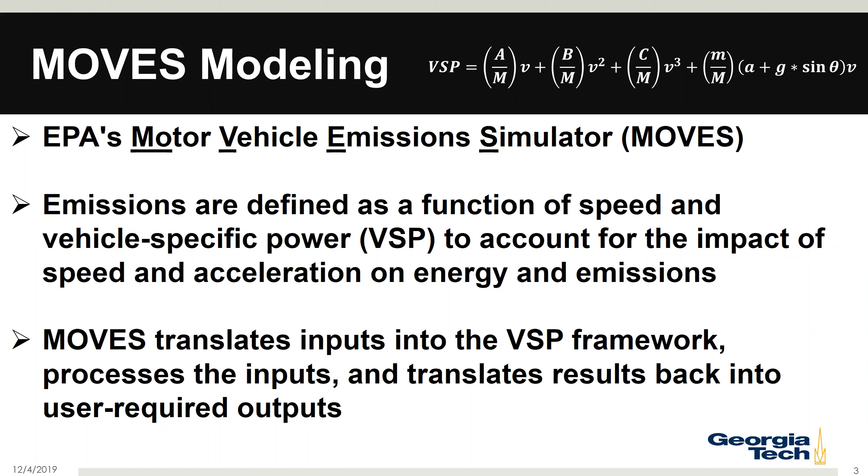And that translates into differences in vehicle-specific power and therefore energy use and emissions. So the bottom line here is that because MOVES is translating your inputs into this VSP framework, and then operating within the model and then translating these things back out into emission rates, we wanted to develop a system that would allow us to do things a little bit easier than working with MOVES directly in each application.

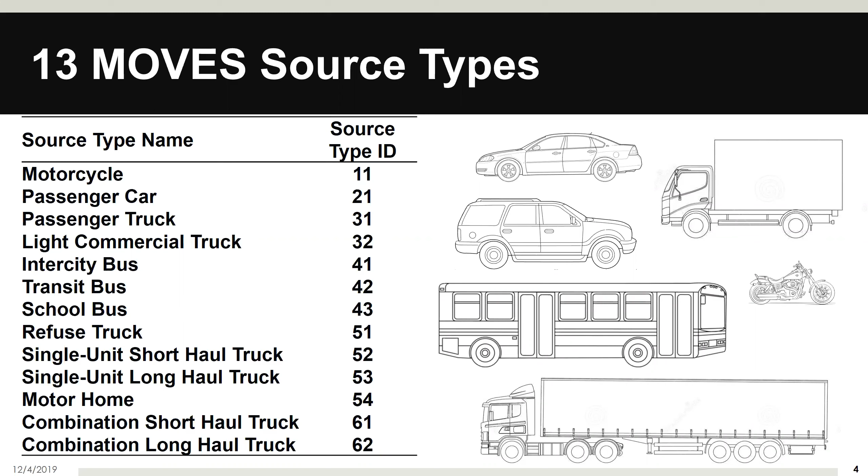MOVES models emissions and energy use across 13 different source types. And so when you run MOVES, you're going to get different emission rates for each of those vehicle classes, and you'll get different emission rates for how those vehicles are being operated. If you look at just a typical emissions rate in grams per second, you can see that we've got 23 different operating bins across there. They're numbered from 0 to 40, but there's some that are missing.

And really, it's divided into a couple of different regimes. You've got 3 different speed regimes, a low, medium, and a high speed regime. And then you have the VSP calculation using the equation up at the top. And as you move up in VSP, you move along those bins from left to right. You've got a braking bin, you've got an idle bin, and you've got low speed coast and medium speed coast. And then as the VSP increases, you can see that each of those curves upward to higher gram per second emission rates.

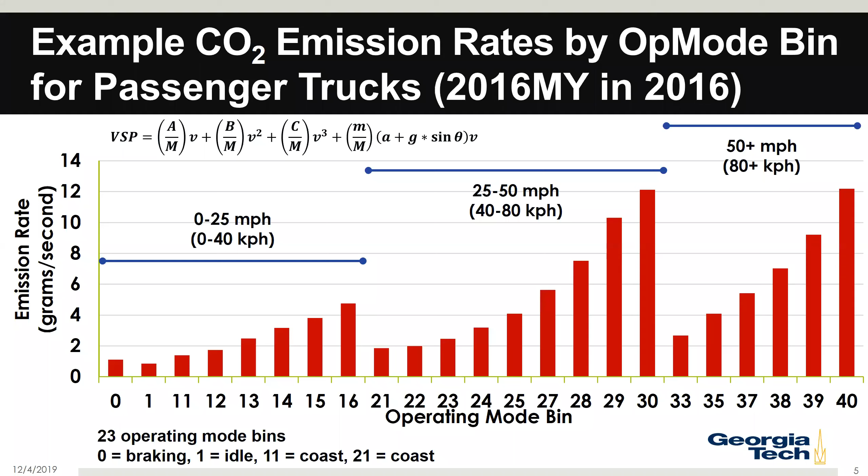So the bottom line with MOVES is that first you specify what the vehicle fleet looks like and break those down into the individual vehicle classes. And then you specify the model years for those vehicle classes. And then you specify the way that those vehicles are being operated, whether you have an average speed and a driving cycle that goes along with that, or you have individual second by second data, you can actually calculate the VSP for those roadway operations.

This animation here is the federal test procedure, the driving cycle. And what we have going on in the upper bound there is the speed, second by second speed over time as the vehicle is driving along on the laboratory treadmill. And you can see that for every second of operation, the VSP is being calculated, and you have the bins of VSP operation down in the bottom. So those correspond to the 23 different bins numbered from 0 to 40.

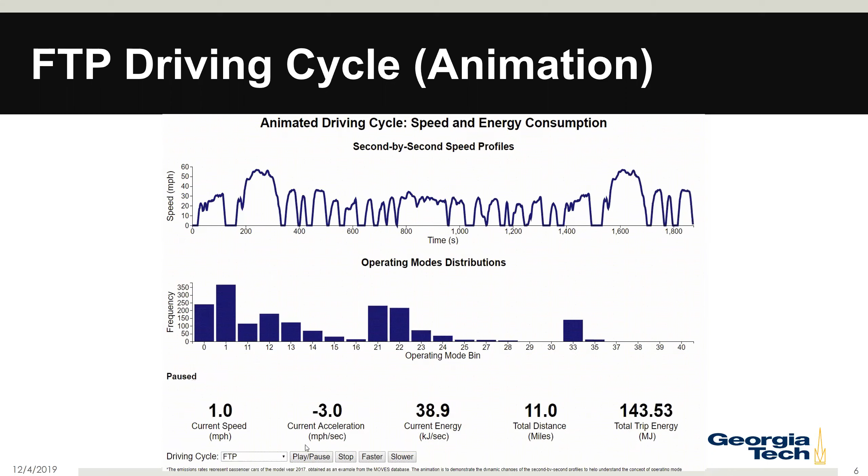And if you look on the very bottom line, you can see the instantaneous speed and acceleration, the current energy consumption, total distance traveled, and the trip energy accumulated over that time. So we've basically been able to hook in with MOVES and those MOVES emission rates to be able to operate the underlying characteristics of MOVES at different spatial and temporal scales.

So if you've used MOVES, whether you've used the old MOBILE model or any of the new MOVES models, modeling complicated networks is really kind of a challenge. And it becomes kind of tedious. It requires that you generate different emission rates for different vehicle operating characteristics.

And traditionally, modelers have tried to simplify things by, I don't want to say dumbing it down, but by aggregation to say, well, we're going to assume that all vehicles are driving under the driving cycles embedded in the average speed and facility type. We're not going to care about whether or not there's a difference between the different vehicle classes in terms of their operations on the road. And maybe we'll use one distribution of model years for all of the vehicles, or at least for all of one source type. So we either simplify the inputs, or we create these lookup tables to support the modeling that we do want to do.

And that generally consists of running MOVES for those scenarios. Let's say, I want to have an emissions rate for 25-mile-an-hour average speeds on arterials that I can apply in Cobb County, because the fleet is different in Cobb County than elsewhere. You pre-run all of those different conditions that you want, generate your lookup table, and then apply the lookup emission rates in the modeling that you're doing.

So the goal here with MOVES-Matrix really was to pre-run MOVES for all of the different combinations of input data. So configure it for distributed computing so that we can take advantage of multiple cores on a supercomputing cluster. Iterate the inputs across all of those different input combinations and run MOVES thousands of times for a region in advance of having to do the modeling.

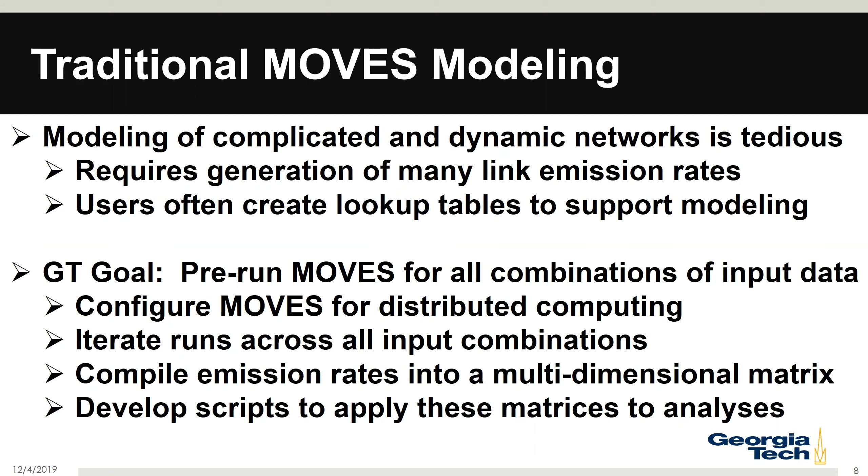And then compile all those outputs, those energy use and emission rates, into the multidimensional matrix, so that's MOVES-Matrix. And then finally develop a series of scripts to then apply these matrices to any analyses that we want to run. For a metropolitan area, it takes about 30,000 MOVES runs to do the on-road exhaust emission rates and energy use. So this is not the hot soak, it's not the extended idle, it's none of the other supplementals. We'll talk a little bit more about that later on, but it takes an awful lot of MOVES runs to do this. It's across 21 calendar years.

In Atlanta, we have a summer, a winter fuel, and a transition fuel for a number of months as we go from the summer to winter and back. We're doing 23 temperature bins, so 5-degree Fahrenheit increments, and 21 humidity bins. It takes about 20 minutes per core per run, so about 5 days to process all of the different emission rates or all the different input files for Metro Atlanta. And that's given we get about 80 cores at a time that were assigned by the computing cluster that I'll show you in a minute.

The bottom line is we're generating not hundreds and thousands and millions, but 5 billion running emissions rates per region. So it's a pretty good sized matrix. It's 121 gigabytes. We've done more than 1 million MOVES modeling runs, probably about 1.1, 1.2 million modeling runs to date to generate the state of Georgia, state of Texas, Vermont, a variety of different locations across the United States. I should point out that this is assuming a fuel specification program and assuming an inspection and maintenance program. So for each modeling region, if they have a different fuel specification or inspection and maintenance program, you have to do the 30,000 MOVES modeling runs.

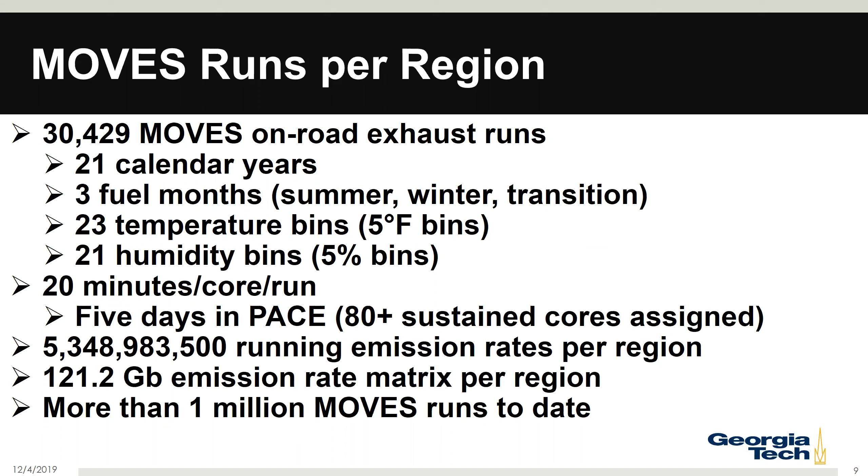It turns out that across the United States, there's 117 different combinations of fuel specification and inspection and maintenance program. So running MOVES-Matrix for the entire country is a little bit daunting on an 80-core supercomputing cluster assignment. So much larger computing clusters are needed to generate everything for the entire nation. But we've been responding on demand as folks need applications. We will develop the models for their region and send them the results on an external hard drive, 121 gigabyte matrix, and all the Python scripts that they need to process.

So the way that we do this is through what's called the PACE supercomputing cluster. It's actually a co-op more than anything. Faculty members that want to participate in the co-op, they have a research project that will provide funding to purchase new cores for the system. I'm not sure if this is a sustainable system because as old cores go out, new cores have to come in. I'm not sure if this is a pyramid scheme or not, but the bottom line is you buy your way into this, and then you're assigned cores based on the number of cores that you've contributed, and then excess time on cores is made available to individuals as a function of being online and availability.

It's a pretty good size system. We have a new system that's just been implemented over in a new building that's been constructed on campus. We're looking into how to get onto that system that's much larger and much faster, but this is still an outstanding resource for us. I would also say that one of the big benefits of this supercomputing cluster, and I can't recommend it highly enough, is the fact that they have staff that are stationed at PACE that work with the researchers. So these are not just computing staff, these are research staff that operate out of that system, and we collaborate with them on a variety of different projects. So they're great to work with and provide a lot of really good support.

And they also tell us when we're breaking the system, which is an advantage for the overall system, not necessarily for us. We have found that MOVES is not structured as efficiently as it could be for operating on a supercomputing cluster.

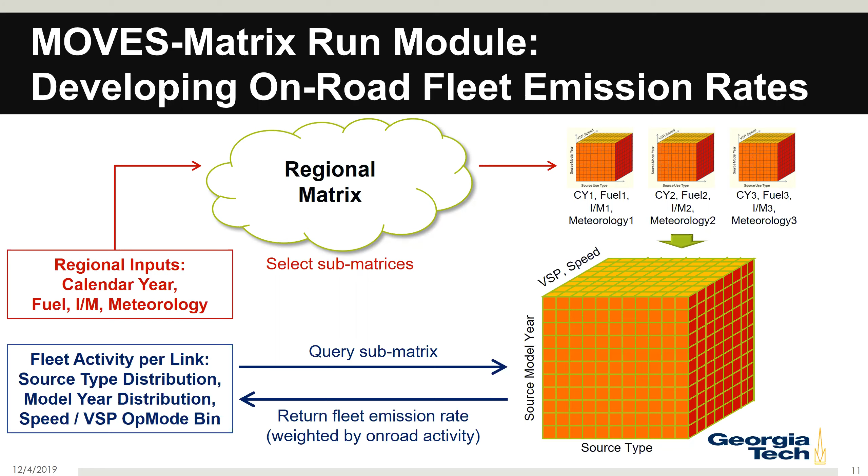And the advantage of this is that we get exactly the same results as using MOVES. All we're doing is outputting all of the possible combinations, and then we're reassembling those combinations in the exact same way that MOVES does before it gives you your gram per second or gram per mile emissions rate. And I don't know about you, but I don't think I've ever worked with a project where the R squared was 1. It is a perfect match, which is great. So the differences that you see at the bottom are only associated with rounding, and that's not 0.01%, that's 0.0001%. So it's an excellent match.

We also developed for the Atlanta metro area, not for any other regions, what is known as MOVES Matrix 2.0. We knew that we didn't have the start exhaust emission rates in there, truck hoteling and evaporative emissions, and we wanted to be able to do regional emissions inventory analysis for the Atlanta metro area. So yeah, we have the running exhaust that we can do for anywhere, but doing this for all of the start and soak and all of those emissions takes a lot longer. As I recall, it takes about 20 days on the supercomputing cluster to generate the matrices for a region, and the matrices are absolutely huge. But we have done it. We're capable of doing it for any region. It's just a matter of having enough supercomputing time to generate the rates for other folks. And again, we get the R squared of 1.

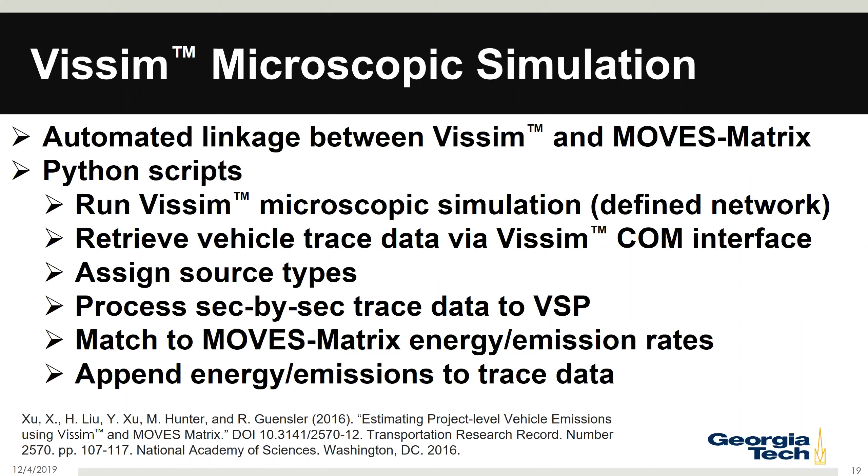So we process each of those second-by-second traces to VSP. We match the individual vehicles with the energy and emission rates that go with it. And then again, through the COM interface, we append the data back to the trace data. So in the output file, you then have the ability to look at the animation of energy consumption or emissions. This is for CO2 emissions, so energy consumption as well.

But really what we're doing is calculating the second-by-second VSP for all of those vehicles, applying the emissions rate, and then animating that output. So you can use it for comparative analysis for scenarios, like you're going to change the highway operations design, add a lane, subtract a lane, change a weaving section, all of those things that VISSIM will allow you to look at, and then you can generate the energy and emissions changes that go along with that.

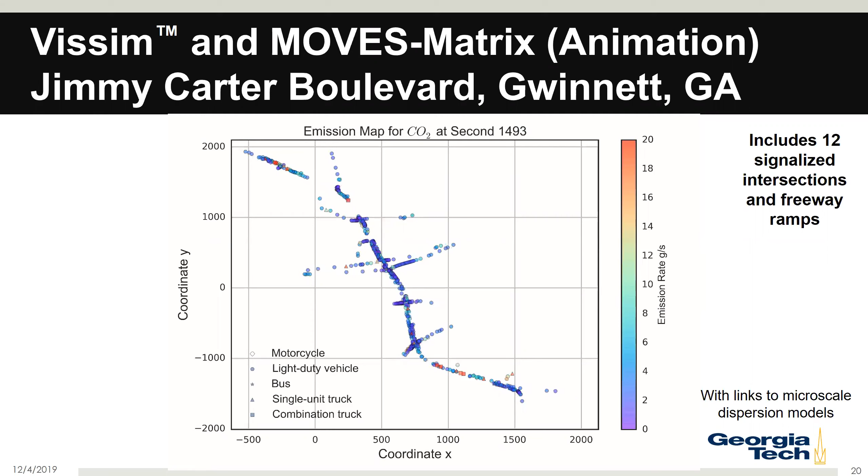AERMOD is the pollutant dispersion model that we're currently using. This is what Daijin has been working with on the supercomputing cluster. We use it both for air quality impact assessment for things like environmental impact assessment, comparing across alternatives, for conformity analysis, and for health impact assessment.

So the goal here really, because AERMOD is another one of those models that takes a while to run, is to try to speed up the predictions of downwind pollutant dispersion from vehicle activity, and then to also do some link screening, which we'll come back around to, basically ignore those links that aren't contributing emissions at a receptor that you're interested in. So AERMOD for microscale dispersion is available free for anybody to use, and we'll talk a bit about how we do the worst case pollutant concentrations and identify hotspots.

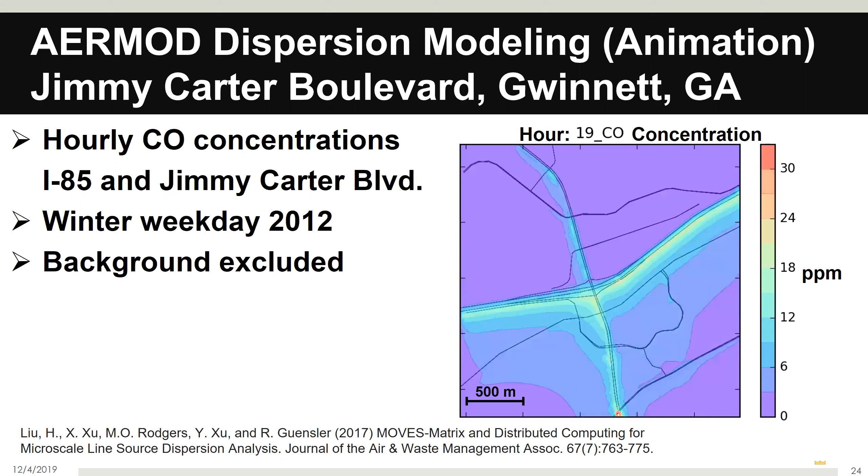So what's going on here is a linkage between the traffic volumes observed on Jimmy Carter Boulevard and the hourly CO concentrations that result. This is for a weekday in 2012, where the background concentrations are excluded. And the concentrations are not super high. They get up quite a bit at the peak of the peak.

And in terms of the regional scale applications that we've been doing, and we'll talk about how we speed up those processes in a minute, if you look at the time it takes to look at the impact of every single link on every single receptor, where you've got a grid of receptors over the metro area, it takes about 10 days to process on the supercomputing cluster. So think about it. We've got an awful lot of links that break down to 161,000 individual polygons for AERMOD analysis. We've got 1 million receptors that we overlaid on this grid. So it's quite a computational process.

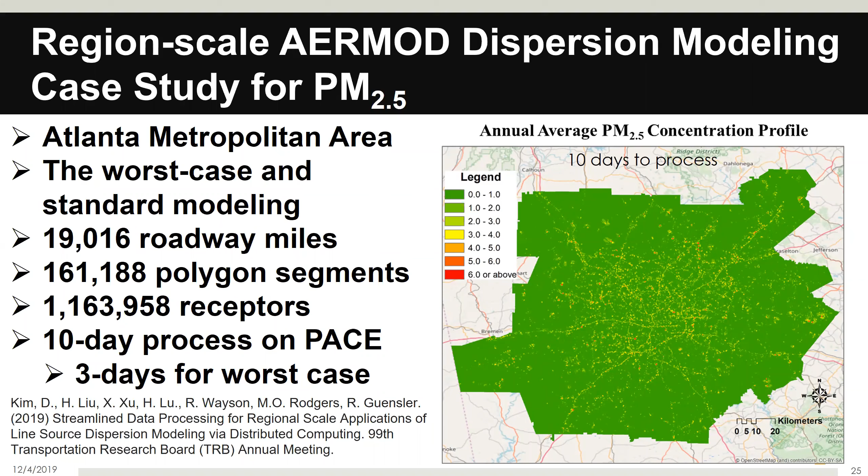You can do a worst case analysis using the highest emissions rate selected, and it only takes about 3 days to process that. But you have the capability of both doing a regional analysis over a long period or doing a short-term analysis to get those highest pollutant concentrations.

Before we move on to the next step, I do want to mention that one of the things that we've been doing is working with grade. And part of helping Liu's dissertation work a couple of years back was to develop a process and procedure for generating road grade at very high resolution over the transportation network in Georgia.

For Atlanta alone, we have about 1,400 miles of freeways, 7,500 miles of major arterials, and 12,000 miles of local roads. And using the U.S. Geological Survey's digital elevation model, and a variety of techniques for filtering and smoothing, and inserting roadways where you have bridges over culverts and things like that.

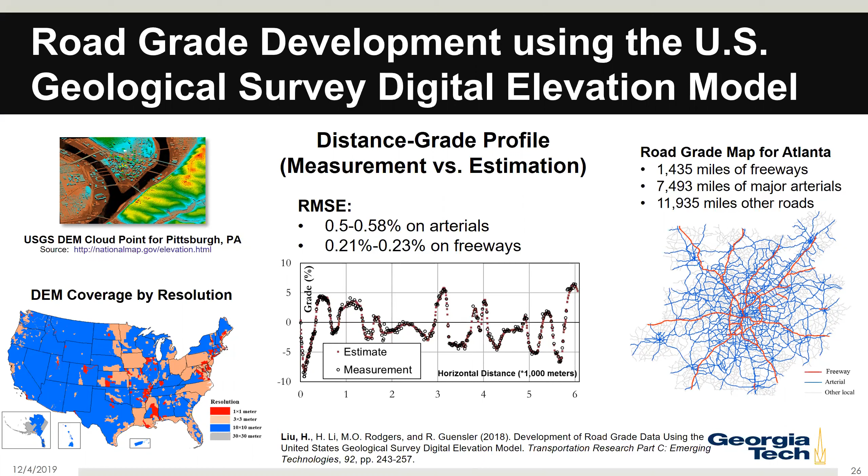That process allows us to get about 0.5% grade accuracy on the arterials and down to around 0.25% on the freeways. So this is really good quality grade data at very high resolution on those freeways and the arterials. So having the availability of this high resolution digital elevation model, you can take any second by second data from observations in the Atlanta metro area, and you can assign for every second of operation, not just the speed and acceleration that you may have monitored or simulated, but now you can assign the grade to that based on the actual roadway grade for that location.

I mentioned at the very beginning that it does matter what the speed and acceleration characteristics are, and what the grade is. So in other words, when you're looking at heavy duty trucks, for example, the upgrade is different than the downgrade. Not as much for the light duty vehicles; they operate pretty similarly. Knowing what the grade is in terms of the VSP calculations does matter across the board here. Knowing the difference between the speed and accelerations across the grade distribution, say uphill versus downhill, is not nearly as important for the light duty vehicles, but does become important for the heavy duty vehicles.

So this is one of the applications that we've developed with the activity data that was collected on a second by second basis for the metro area as part of the Atlanta Regional Commission's travel diary surveys that they did in 2011. So we actually had about 500 vehicles that were monitored second by second. And then we collected data from a variety of MARTA bus lines and different activity characteristics on different routes. So it does make a difference.

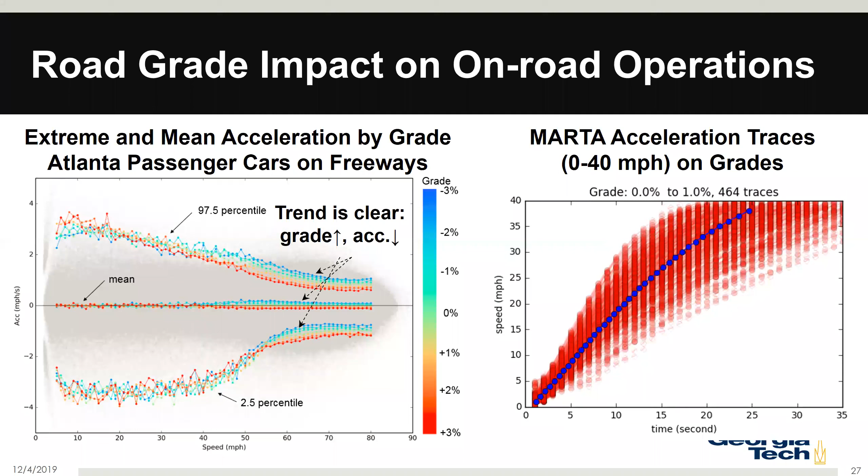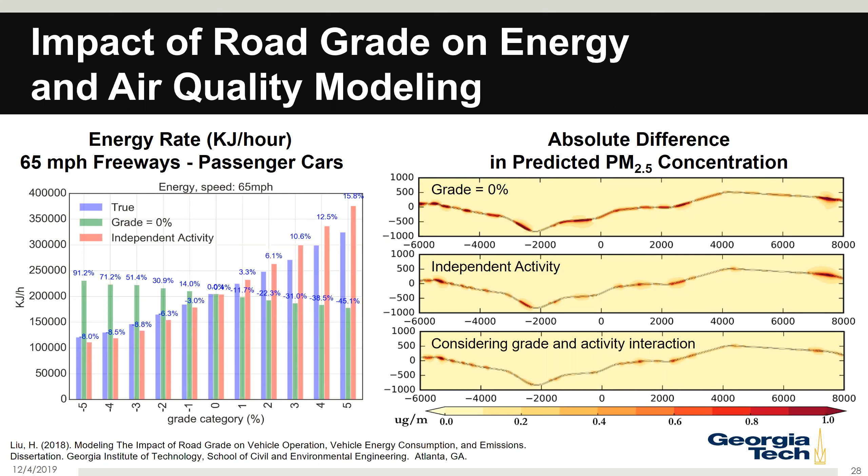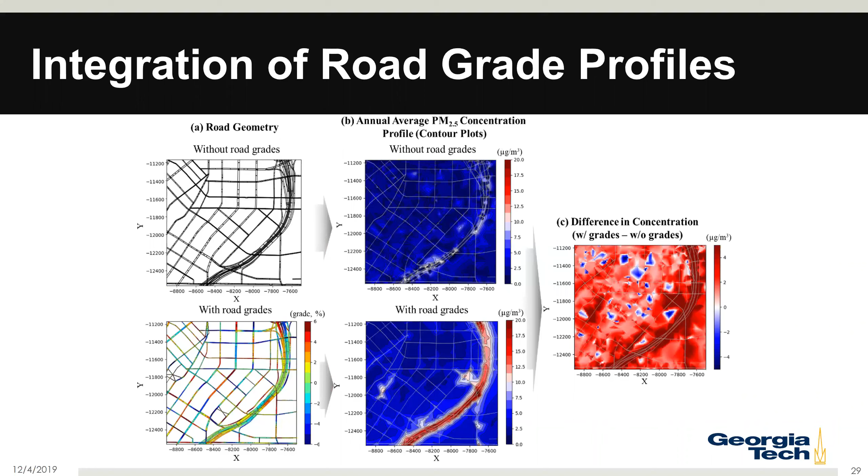The last thing I want to mention is with respect to gridded modeling, because again, when you think about it, what if you can do all of your AERMOD analyses for a transportation plan at once, right? If you can look at every single location in the metro area by running everything in background on a supercomputing cluster, so that when the Atlanta Regional Commission finishes running their scenario, they get the emissions inventory for the region broken down by all those different characteristics. And then they can also get the predicted pollutant concentrations across the entire region. It makes our planning processes much more agile.

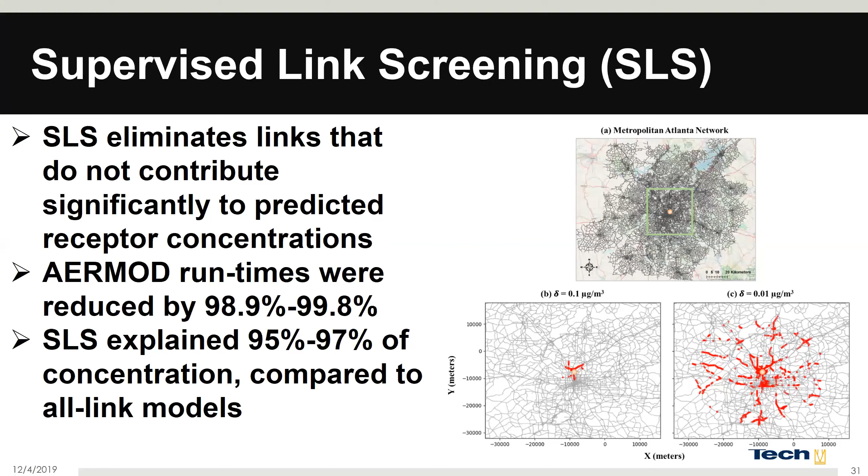So before we wrap up here, I'd like to talk a little bit more about some of the ongoing modeling work we have going. We got 2 new dissertations that are out. One is on the use of Autonomie to essentially generate VSP compatible emission rates for hybrid and electric vehicles, so that we can incorporate the modal-based activity for plug-in hybrids, hybrid electric vehicles by different type of hybrid, and battery electric vehicles into the MOVES framework. And then the second one uses the same kind of approach for the transit vehicles, but also includes some optimization models.

Forthcoming, we have some distributive justice assessment tools coming for planning, where we look at pollutant concentrations, impact on folks in the metro area, and looking at the outputs of the model with respect to whose activity is occurring and who's being exposed by income, household size, and all the other demographic characteristics. But because MOVES doesn't currently include battery electric vehicles and the like, we wanted to have some kind of a model that would be comparable to all of that.

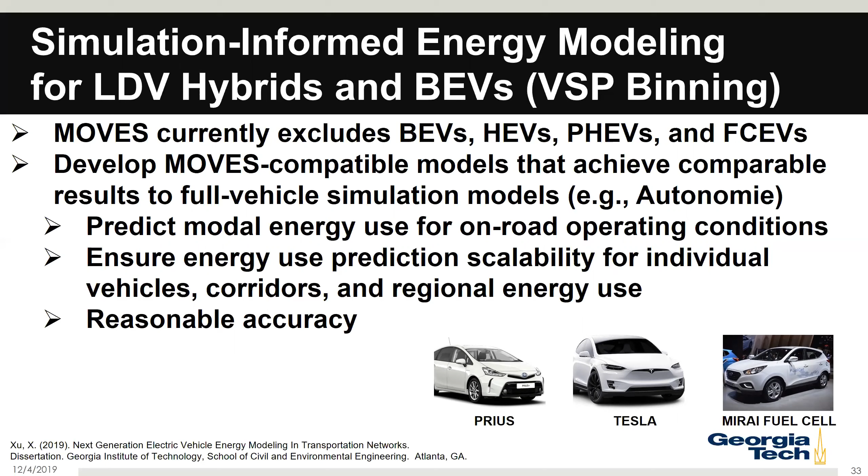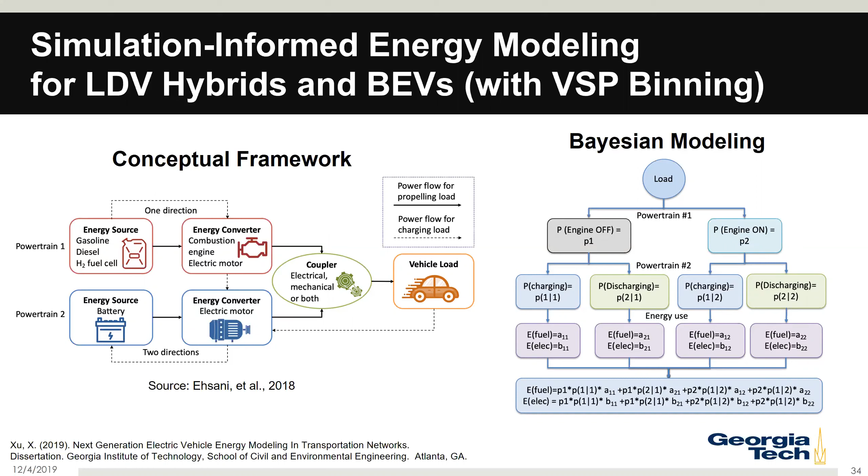And then for those operating modes, using Autonomie outputs for 50,000 second-by-second trips to develop essentially a VSP binning, a machine learning process to develop VSP binned emissions rates and energy use across both fuel consumption for hybrids as well as electricity consumption. And I have to refer you to the full dissertation to get the entire body of work. It's 150 pages or so.

But the bottom line is that it does a really decent job for the fuel consumption. We can do better on the electricity consumption, but really that comes down to the specification of the vehicles that we've used in the Autonomie modeling. So yeah, I know we are predicting predictions, right? We're taking a simulation model and we're taking those outputs and then we're predicting as efficiently as we can those simulation model outputs so that we can use them in the MOVES VSP binning approach.

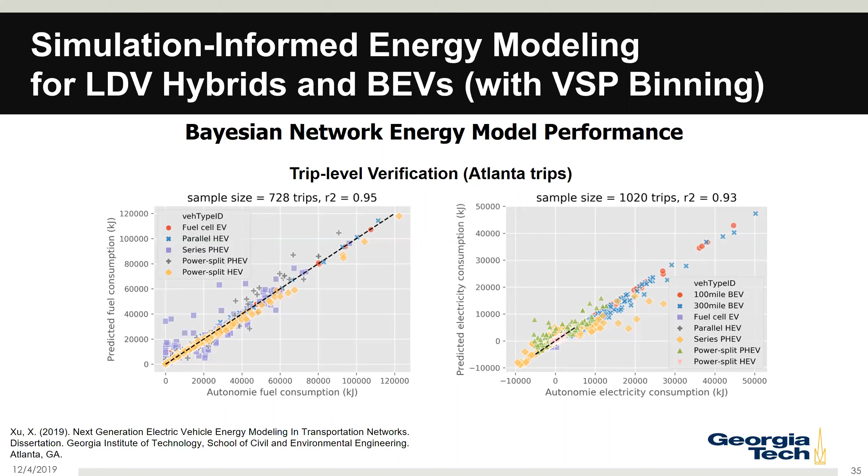But we think it's much better than what we have right now, which is pretty much nothing. So this is really good, and you're going to see some enhancements of this coming down the road.

In looking at the application, kind of scalability components of this, she applied this again to the metro area. She used the travel demand model outputs in terms of the trips and the origin destinations, and then used an interface with one of the Google tools to essentially assign routes, and then looked at the actual energy consumption being predicted. And the bottom line is we're going to get a pretty decent reduction in energy use with the electrification of the fleet.

And it was about, I'm trying to remember the percentage numbers now. I think we put it on here. Yeah, we didn't. If we can get to half of the fleet being battery electric or any electric vehicle using the assumed mix into the future, we get about a 30% reduction in energy use. So anyway, stay tuned for that. Her dissertation will be online very soon.

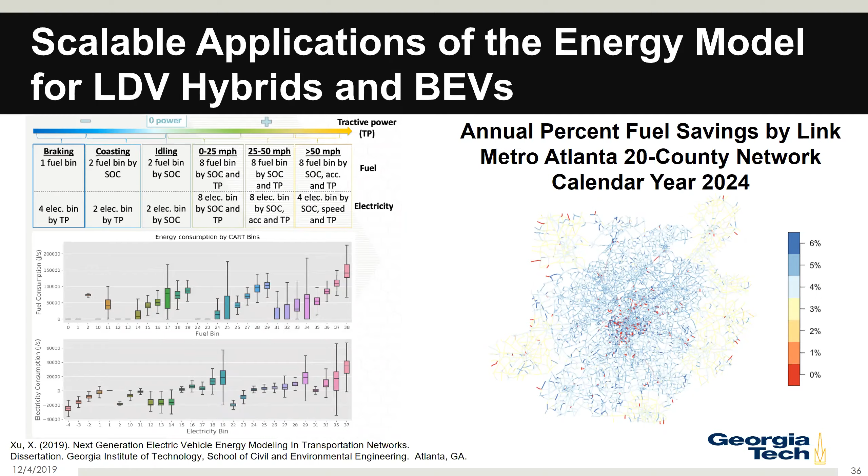The last tool is what we call RoadwaySim and TransitSim. This was developed for the ARPA-E project. We essentially took the 200,000 link roadway network, coded it appropriately in Python modeling to do Dijkstra's shortest path algorithms, and integrated the 90+ MARTA bus and rail routes and the 23 GRTA Xpress bus routes using GTFS data for routes and departure times and for station locations.

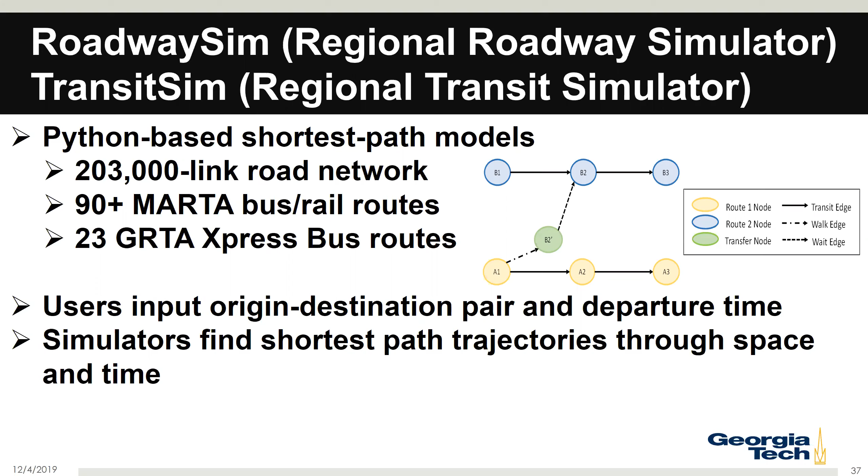And with this process, basically we developed a system where you can pick any origin, pick any destination, and the system will give you the shortest path from origin to destination by any mode you choose. So you could drive direct, you could carpool, or you could take your vehicle to a transit station, do park and ride and get on transit. But it allows you to do the shortest path modeling through the network.

And so that modeling capability was translated into this new framework developed by Ann Lee for optimizing energy consumption with alternative fueled transit fleets. And so the model is now capable of predicting transit vehicle energy use, again, using the MOVES matrix components and upstream GREET components. The simplified version of the alternative fuel or the electric vehicle simulations is really good. R² is close to 1, and the mean absolute percentage error is less than 3%.

And it allows you then to assess transit vehicle performance for an array of fuels that you're choosing, like I'm going to buy a hybrid bus or an electric bus, and the routes that they're being assigned to. One of the problems that we have in Atlanta is that we have a lot of grade, and some of our transit routes are quite long, and battery electric vehicles are simply not compatible with all routes here.

But this modeling tool allows you to look at the assignment of the buses to the routes, the impact of recharging station placement, the impact of changing routes to make them more efficient, assigning buses to specific depots. It's really a fantastic model. It's got a lot of technical detail and a lot of different options to work with.

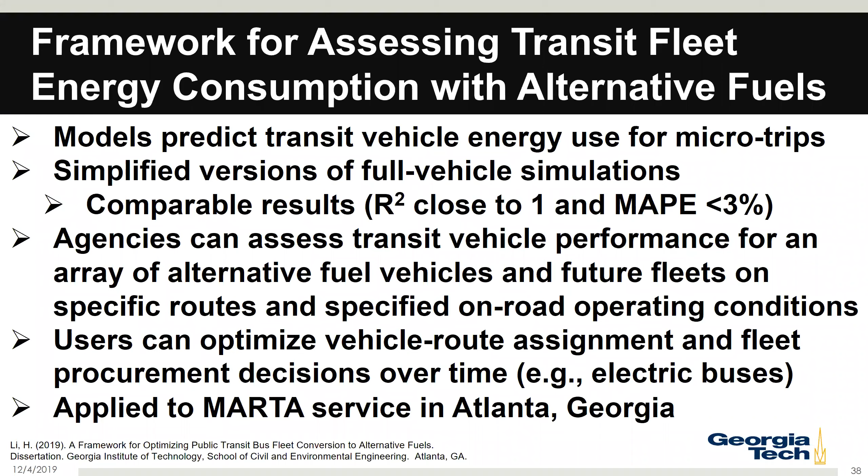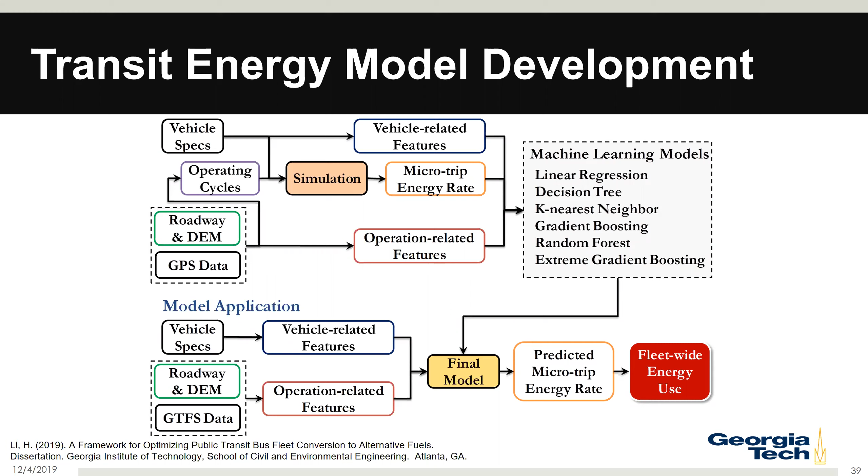So again, in the upper box, we're talking about the use of Autonomie simulation to generate the microtrip energy consumption rates, and then using the machine learning to come up with that final model for applications. But the bottom line is it's a much more efficient application process and allows you to do a variety of scenarios. The simplest is just basically looking at what happens if I purchase an electric bus or a hybrid bus and assign it to different routes, and it'll tell you which is the best route in terms of reduced energy use.

You can then optimize bus route and depot assignment. So think of it as I'm going to purchase 40 vehicles and I want to know where should those buses be assigned based on the most efficient place for the charging stations, which it will automatically figure out for you as well. And then what route should those vehicles be assigned to? And the last one, which I was really pleased that she was able to do because it was so hard, was to optimize the annual fleet purchase and assignment.

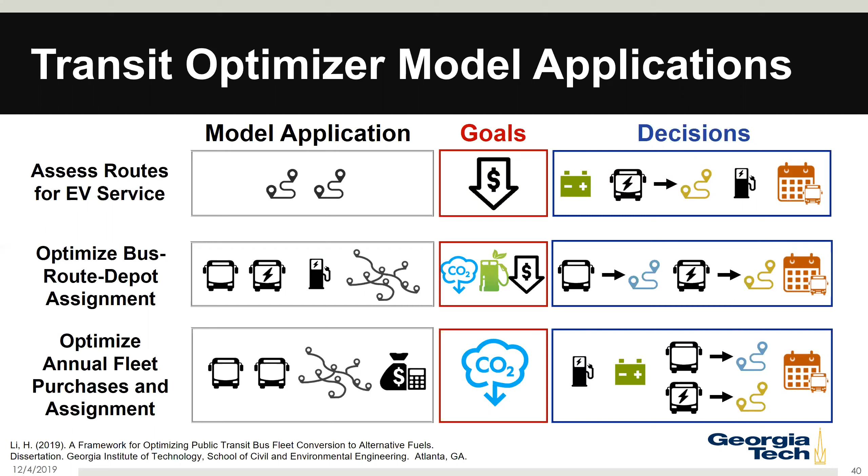So now, if you have a budget, let's say you have $10.2 million for procurement of new vehicles, it will tell you what vehicles to purchase and where to put those charging stations. And if you have extra leftover money, it may tell you to go ahead and buy that charging station that you're going to use next year. So it's another one that I really encourage folks to read.

So in summary, MOVES-Matrix is not rocket science, it's brute force MOVES modeling. We are just pre-running that model 38,000 times and creating 5 billion emission rates to look up. So you get the exact same energy use and emission rates. It is a pre-run process that allows you to work much more efficiently with the output. The processing time to generate an emissions rate is 200 times faster, and you don't have to do any of the coding ahead of time to figure out what your inputs are going to be for the MOVES model. You just have to have the inputs for pulling the results. So it's a lot easier, a lot faster.

It can be applied to any spatial and temporal scale. We can quibble about whether you should apply it to individual vehicles because it wasn't really designed for that, but if you want to look at comparisons of what the vehicles are doing on a corridor as a function of changes, we think that it's still appropriate. You can do regional analysis, corridor case studies, simulation modeling, integrate to apps. It's really quite flexible. The scripts link all of these traditional models with the simulation models. We've got instructions for how to operate those scripts and how to develop your own. And finally, we are linking this with dispersion models, especially AERMOD Grid right now.

Python scripting and coding is required. We couldn't be doing this if we didn't have folks in the lab that can program in Python. In terms of operating with the models, expertise in distributed computing, GIS visualization tools and all that helps. But we've worked with a number of customers. We've got a consulting firm that's been using the model. We're working now with Texas A&M. I know that Vermont has used the model, Iowa State. So we're here to help with respect to the implementation. And all we ask is that you send us a hard drive for us to develop the system for you.